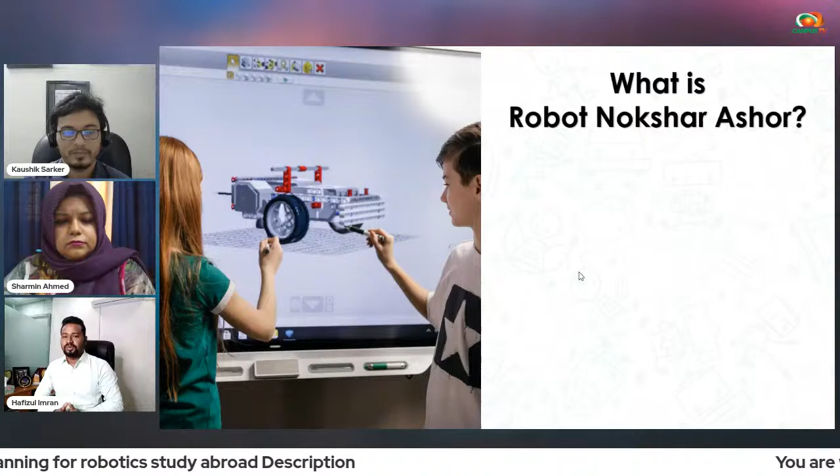Now I am presenting an overview of Robot Nokshar Ashor 2021. So what is Robot Nokshar Ashor? It is a platform where innovators from our country can showcase their innovative ideas through 3D design. This is a place where they can choose any of the allowed categories in the competition and design their innovative idea in the form of a 3D model to submit and showcase in this competition through a VirtualGate.

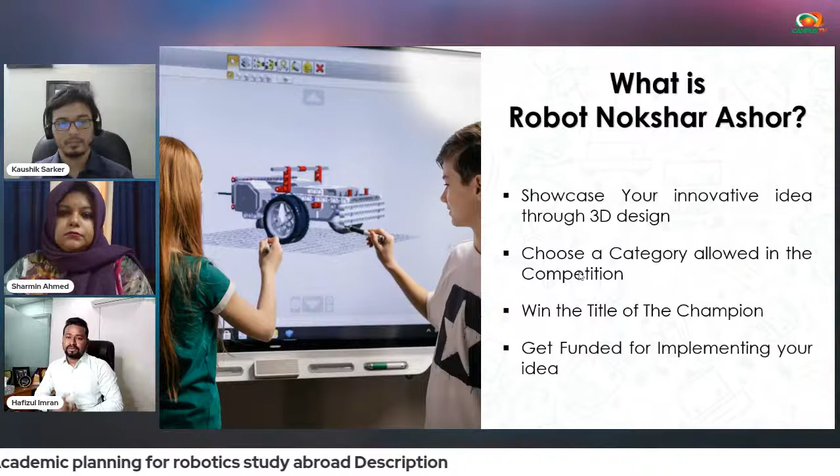After that, an expert judge panel will evaluate their 3D design and announce the winners and championship. After that, finally, all winners will get funding from this show. Participants from different schools, colleges, universities, and professionals are participating in this show. In total, we have selected 30 teams in the preliminary selection for this Robot Nokshar Ashor 2021.

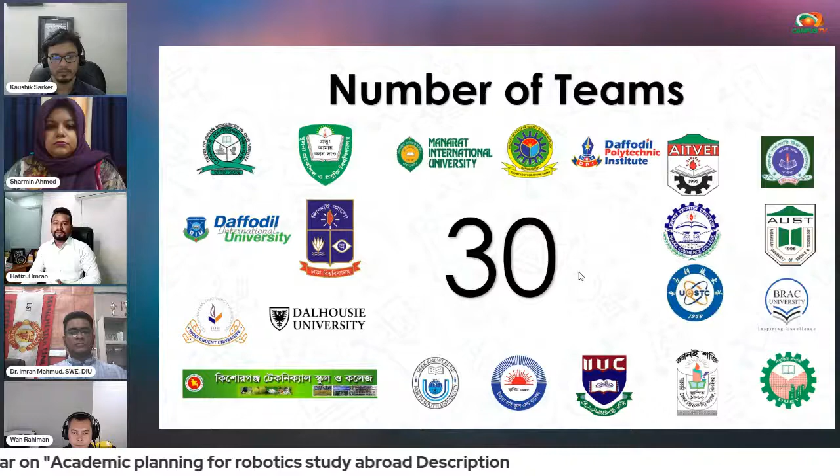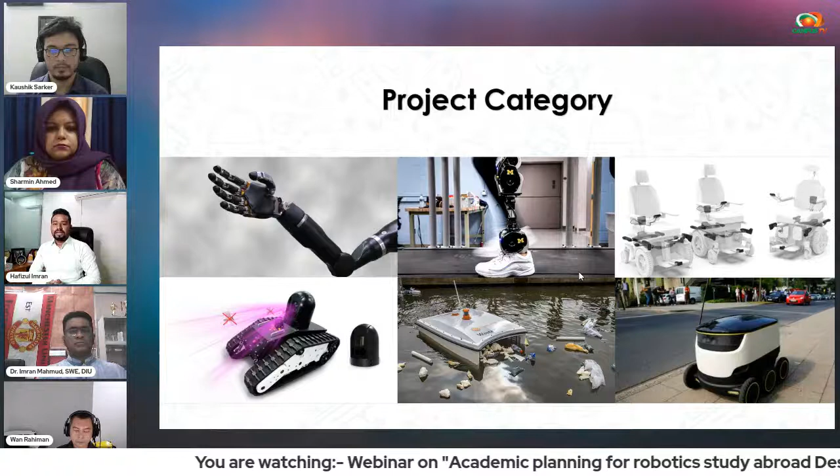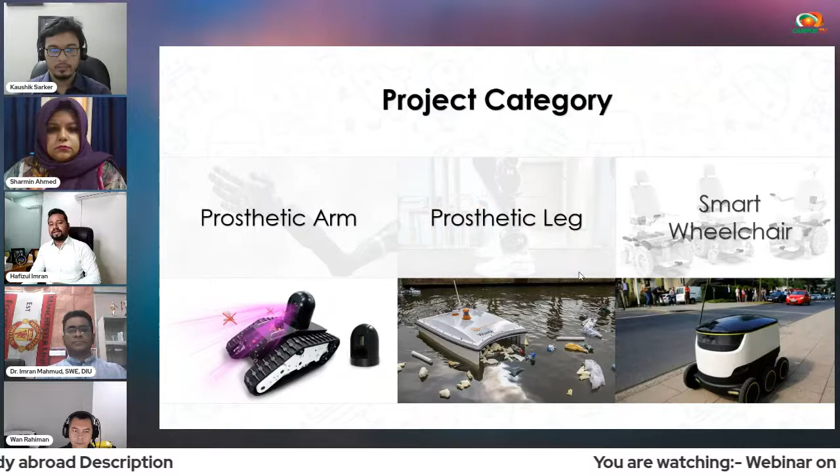These are the project categories from where participants will select one and design their ideas through 3D design, 3D model, and submit their ideas in this competition: prosthetic arm, prosthetic leg, smart wheelchair, robotic mosquito killer, river surface cleaning robot, and autonomous delivery robot. These are all the categories allowed in this show.

So what are the steps in this show? First is registration, second is preliminary selection, and third is training and workshop. We have already completed these three steps, and we are now at the stage of designing the 3D model. In this stage, participants are designing their innovative idea in the form of a 3D design, after which they will submit the necessary files for the final competition and showcase their design through the VirtualGate.

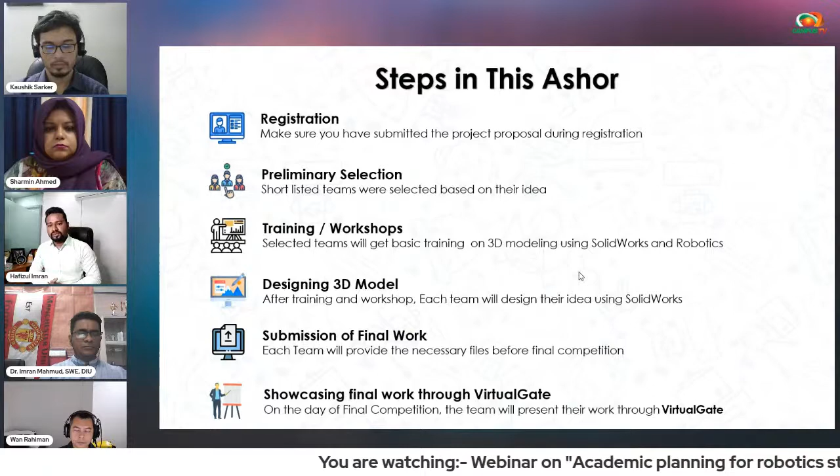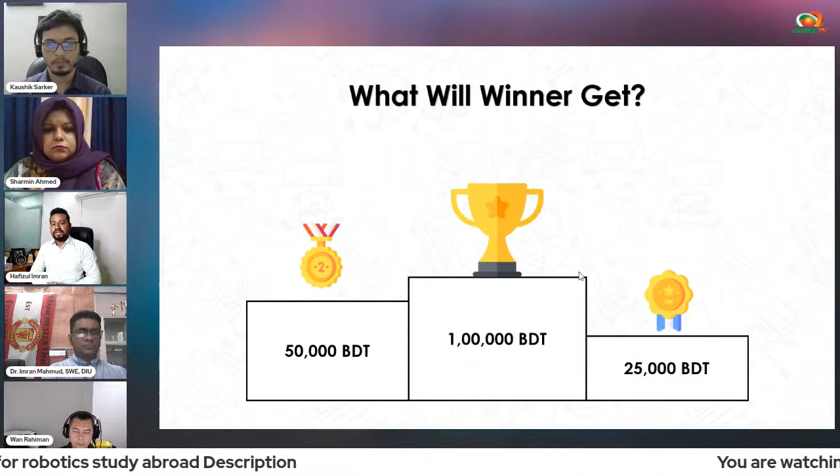So what will the winners get? From this show, the champion will get 100,000 BDT, the second winner will get 50,000 BDT, and the third winner will get 25,000 BDT.

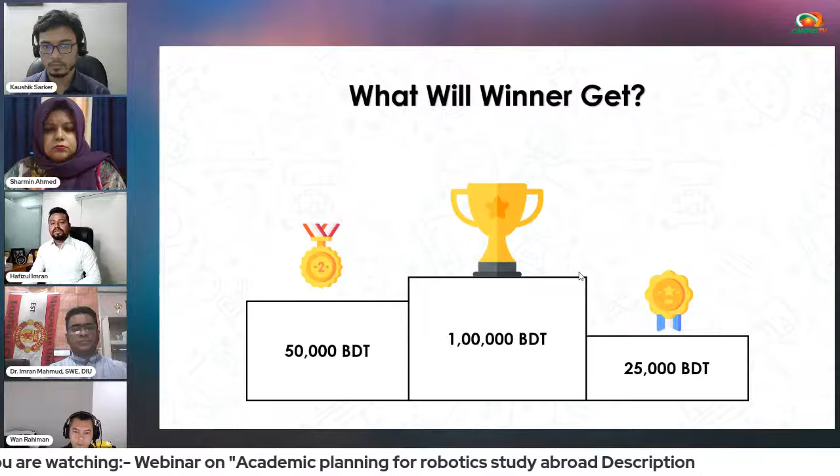This Robot Nakshatra 2021 is proudly organized by Daffodil Robotics Lab and hosted by the Department of Software Engineering, Daffodil International University, and proudly sponsored by Felicity IDC and Daffodil Computers Limited. We have with us event partners Bangladesh Robotics Foundation and JCI Dhaka Heritage, and media partner Campus TV. So this is all about Robot Nakshatra 2021.

Now I would like to present the Daffodil Robotics Lab promo video.

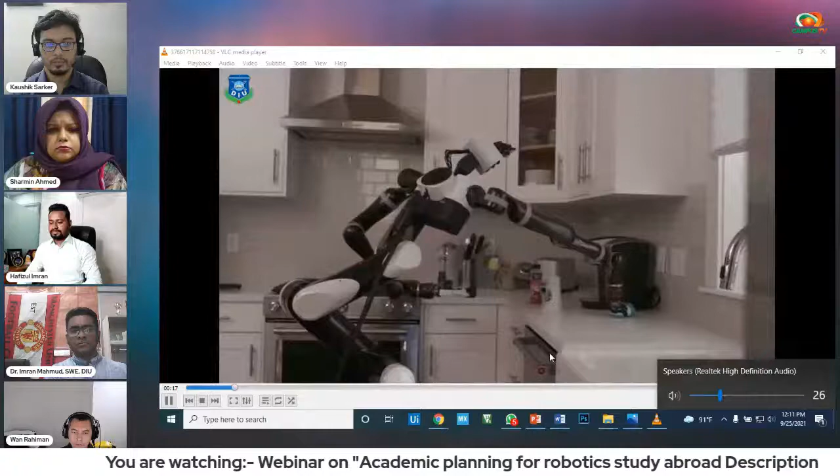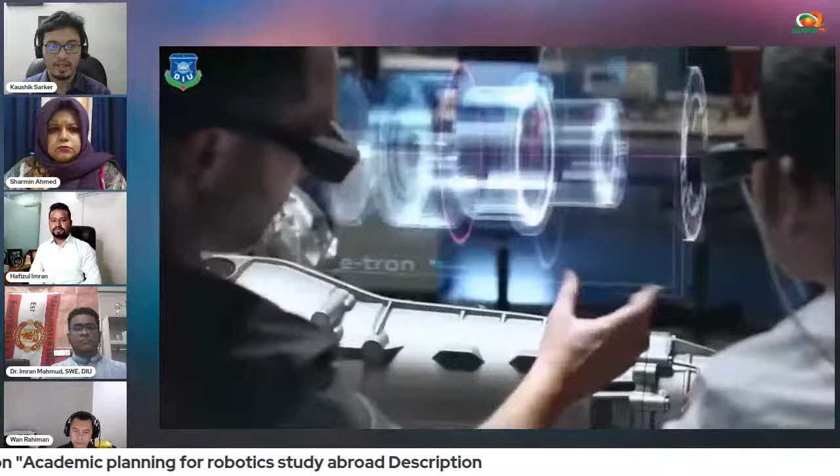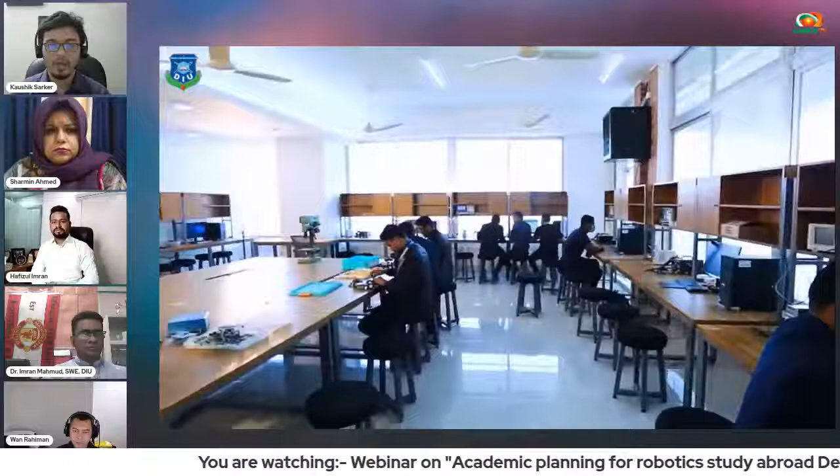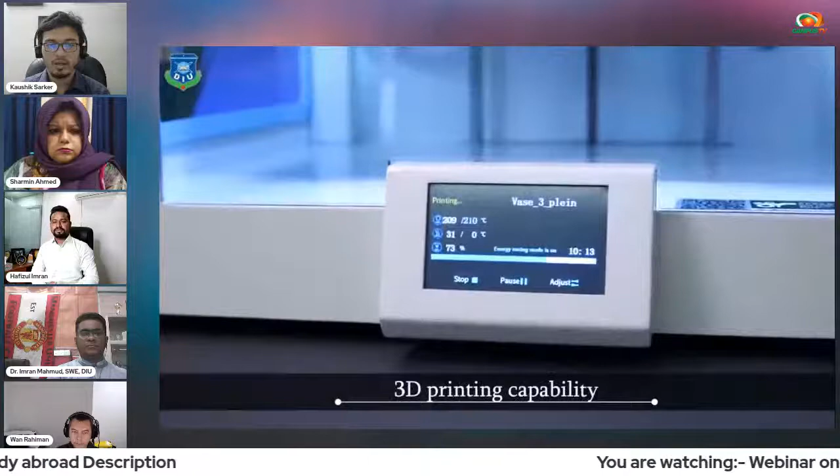Since we're having a problem with the sound, I can at least describe it in parallel. We have an 1800 square foot lab in the Daffodil Smart City. We have two sections in the lab: one section is for students to conduct classes and develop robots in the makerspace, and the other section is all about robotics research. They have a lot of machines, high performance computers, and devices in the lab. Many of the devices have been bought from Japan and China. These robots are from China - UBTECH robot - and Daffodil Robotics Lab has affiliations with other organizations in the world, such as UiPath, UBTECH, and UR Robots, all of them.

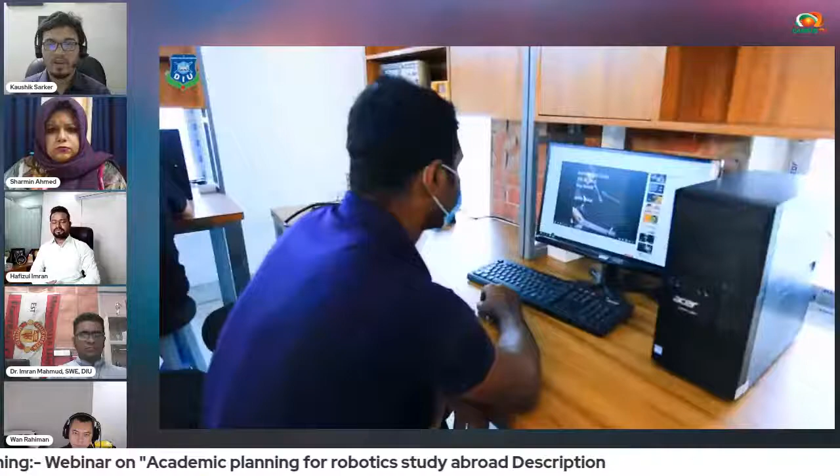It is to be mentioned that Daffodil Robotics Lab already developed their first robot, developed by Mr. Hafizul Imran in association with the Robotics Lab, and the advisor at that time was Professor Takayoshi Suzuki from Japan, who is also a visiting professor of our department at this university.

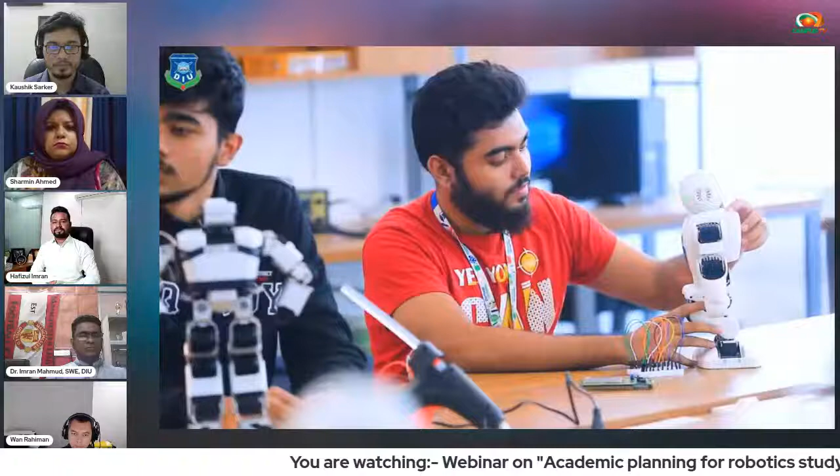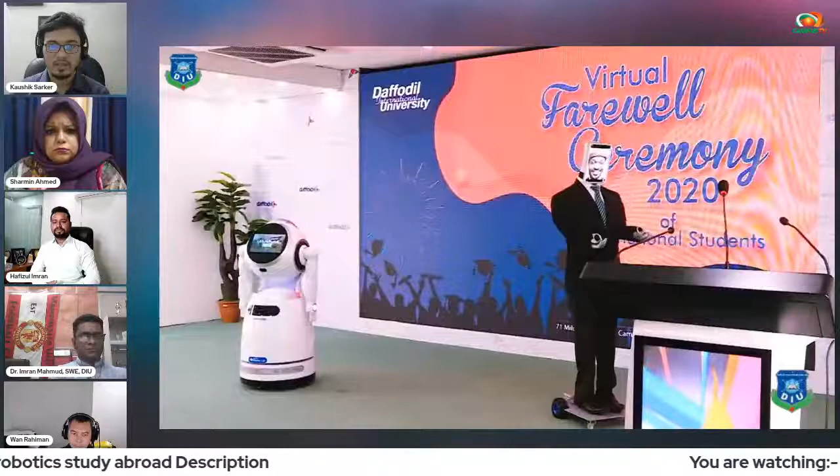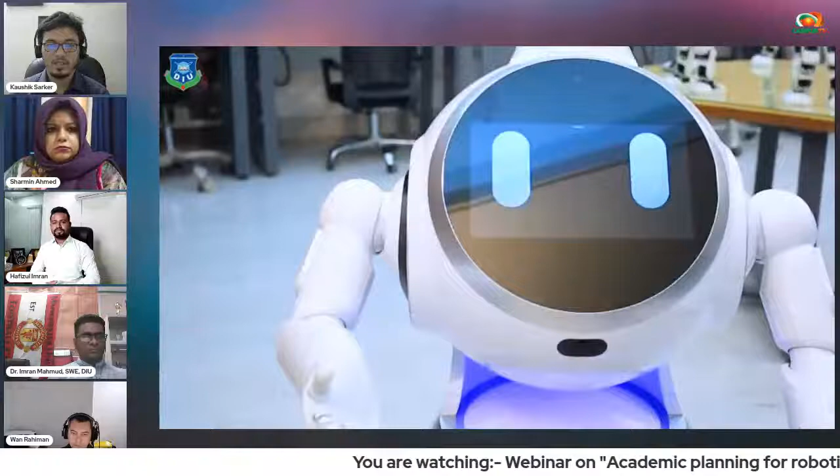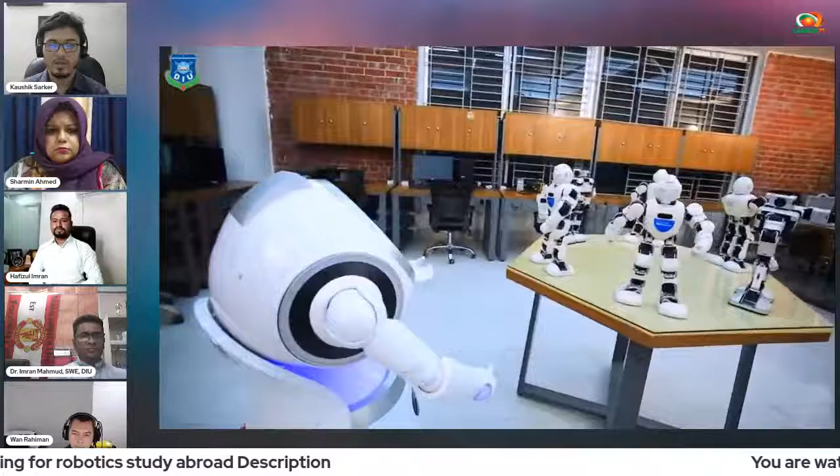We have already facilitated many programs. This is the virtual ceremony of the university, and this is another ICT program of the university where we performed with the robots. We have offered a major in robotics and embedded systems under the software engineering program. This is the Cruzr robot, and this section is the research and development section of the robotics lab.

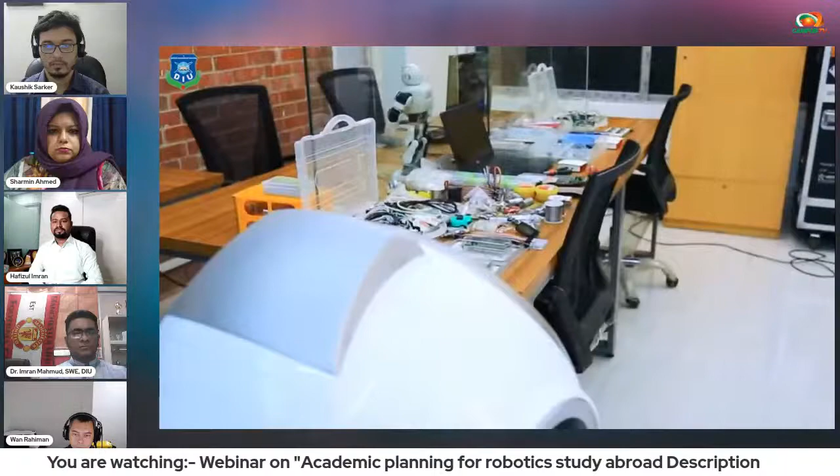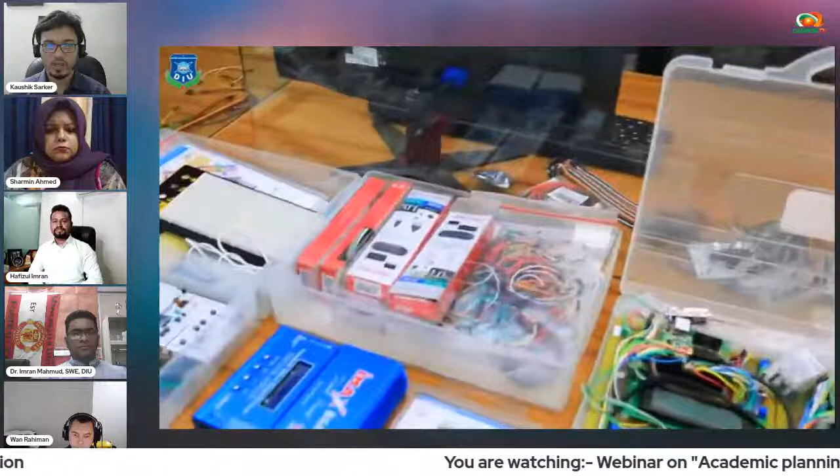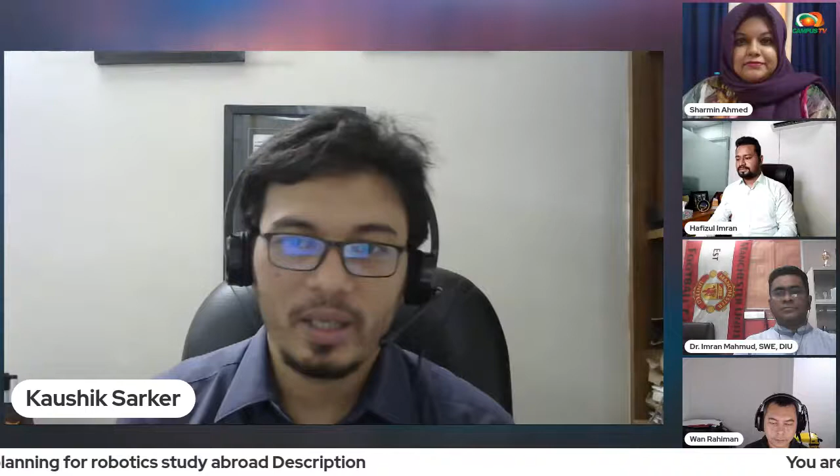Thank you, Sharmin Madam. It was very great to know that you did exactly what our students are planning to do, or maybe they have a plan to do such things in future. So today's webinar is all about the study of robotics abroad, and especially we'll talk about it from the perspective of Malaysia, because they have a world-class university there, and they have this area of interest they are working on.

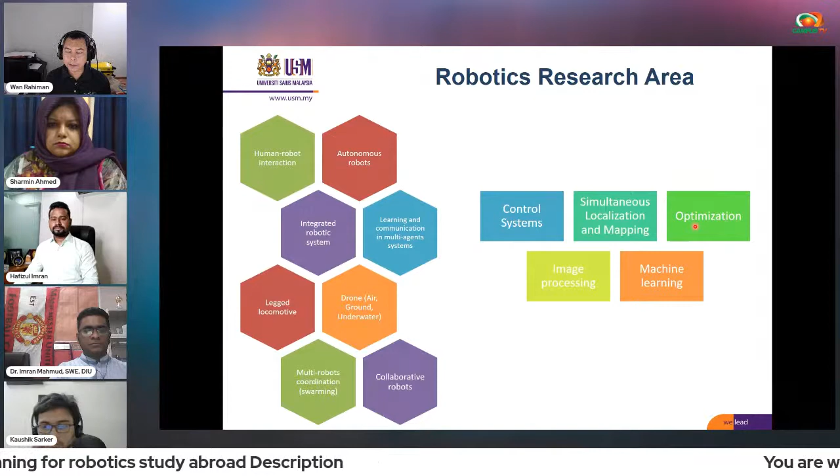And another one is optimization. How you optimize your system so that the robot system becomes more effective and efficient to suit the particular task.

And then another one is image processing. Image processing normally used or implemented to recognize and identify the object, and it also can be used for navigation.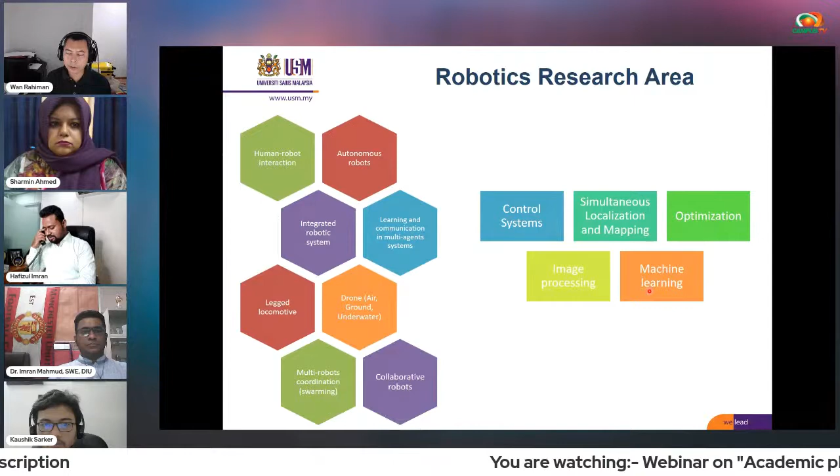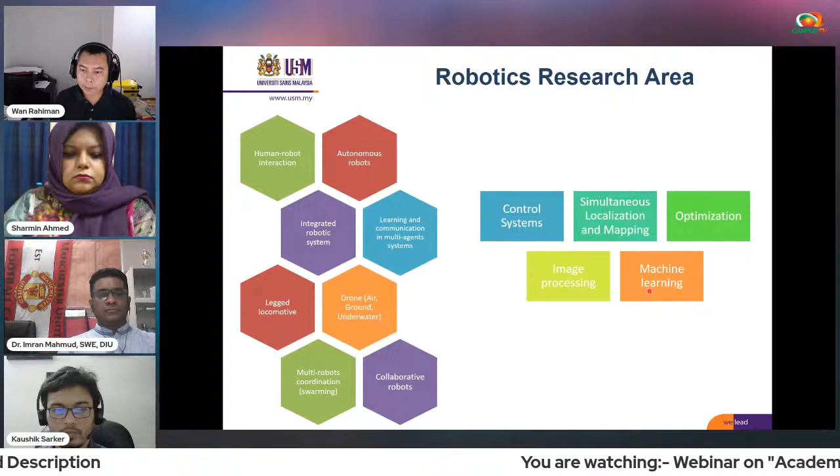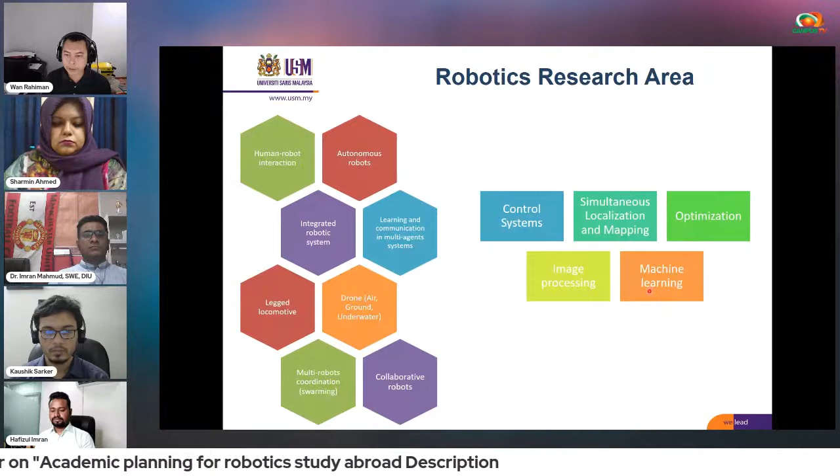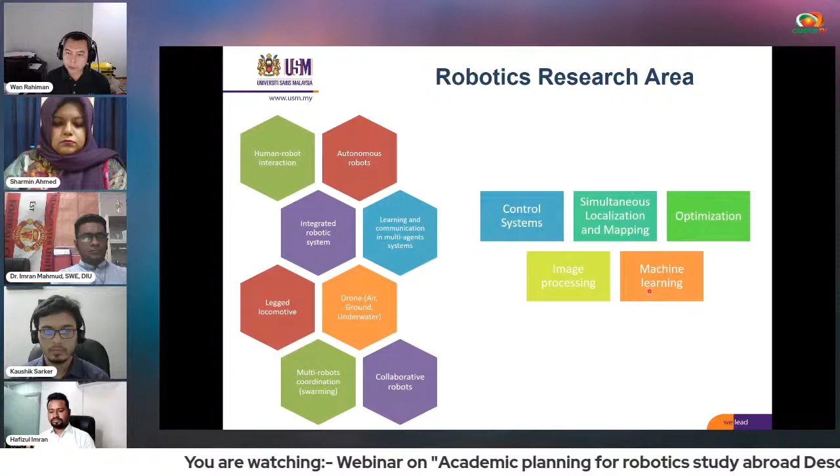And then the next one is machine learning. This consists of AI, artificial intelligence algorithms, how the machine can learn in order to perform a better job. For example, a toddler has to learn many times to pick up and place an object. So with AI features, we can teach the machine to learn to pick and place, because in industry there will be many shapes for the machine to pick, and the object has too many varieties of weight. So if you have lots of shapes and different weights, the machine has to learn where and which position the gripper has to pick up the object.

So because of that, if you implement this AGV in the manufacturing plants, it will affect or impact the productivity of the production line. So because of that, the low output will give low income to the company.

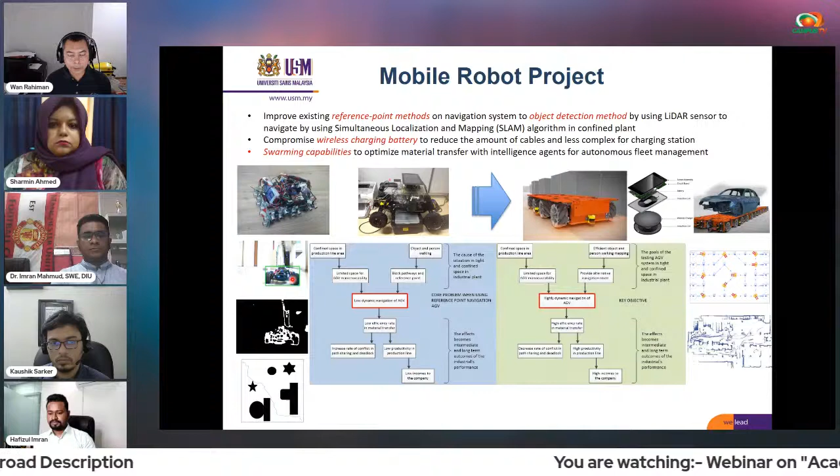So the application here, because here you can see this only for the robot, but what is the real application in real life? It can be applied when we want a partial autonomous vehicle when we drive on the highway. Our vehicle just follows the lead vehicle in front of us, so we just leave the steering, relax, and control only the gas and brakes. This is what we call partial autonomous.

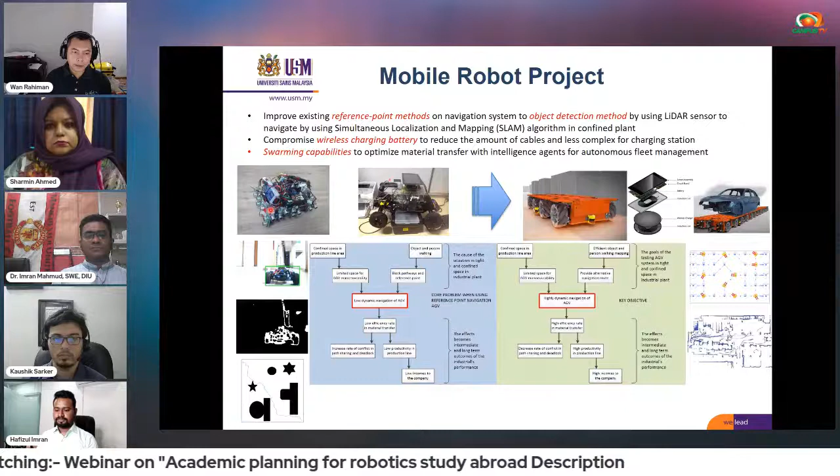So this is my first prototype, and we won a robotic competition in Malaysia organized by National Instruments. We are the champion in Malaysia, and then National Instruments sent us to Australia to compete with Australia and New Zealand team members.

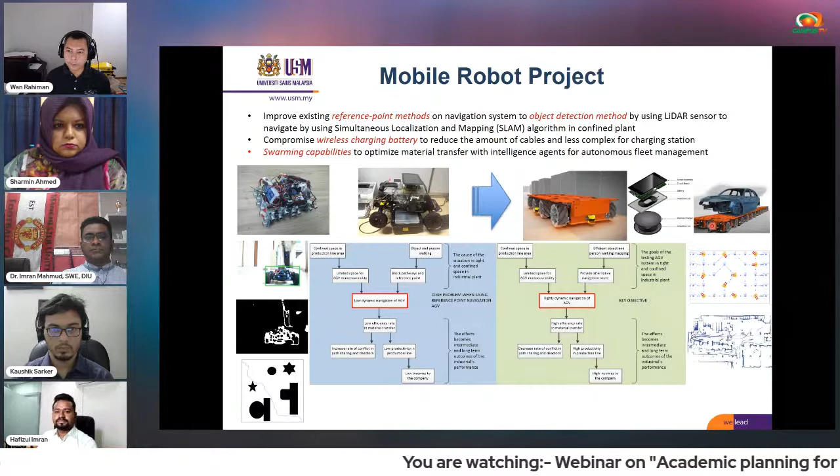So once I developed this small prototype, we went to a bigger model. Here you can see the camera, control systems, and a small computer implemented into the model. Our target is to develop an autonomous guided vehicle that can collaborate with another AGV to perform a fleet, or a pack of robots, to carry out a heavy payload.

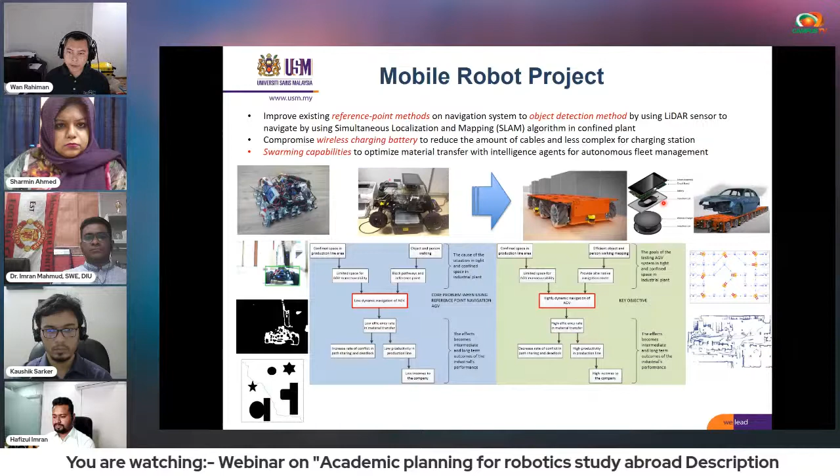And also here we developed wireless charging for the AGV. We use this technology from the latest development in smartphones. We studied how the smartphone can do wireless charging, and we implemented this technology into our prototype.

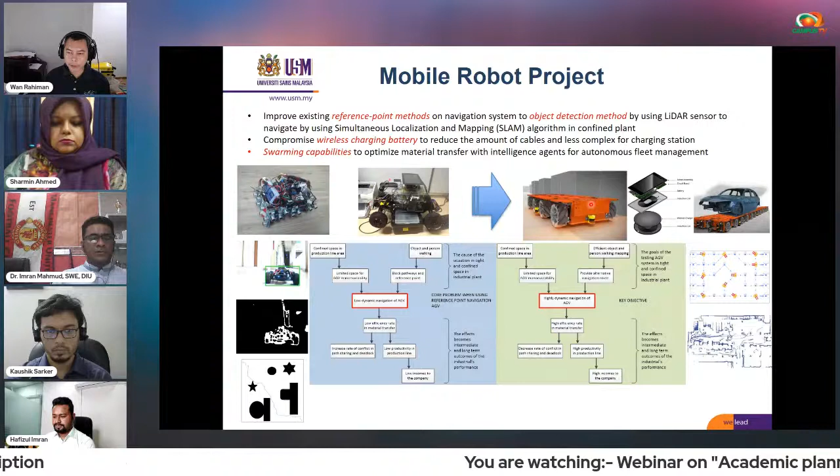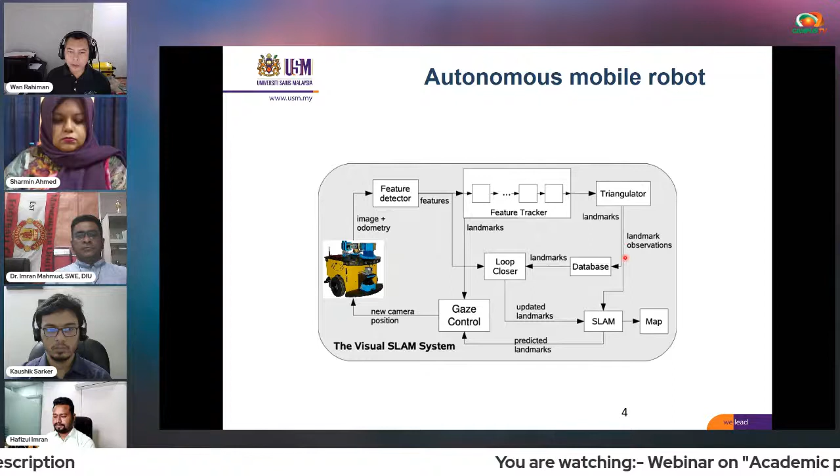On this slide you can see in one autonomous vehicle or mobile robot, there's a lot of controllers or algorithms connected to each other. So here you have SLAM, from SLAM you have the map, and it connects to the controller with feedback and everything. So there are lots of areas that can be explored.

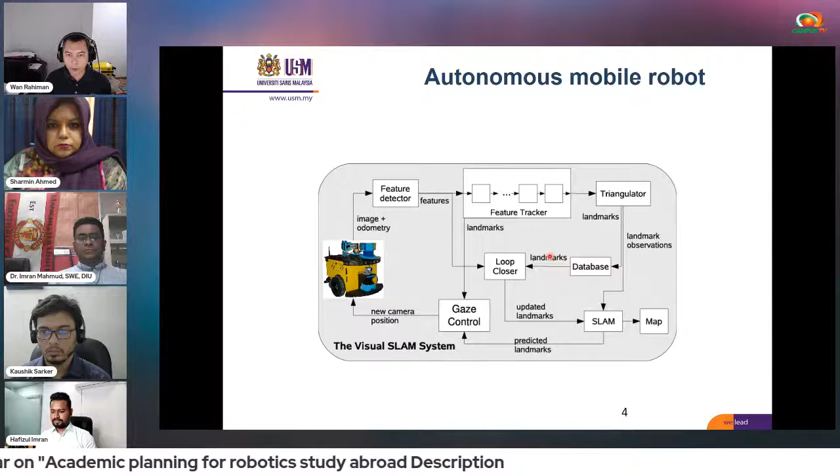For example, first you can have system modeling. From here you have image and odometry to calculate the distance, and from this information you develop the mathematical modeling. So there's another area you can explore, which is image processing, and also LiDAR data optimization.

And also this area keeps continuing into data acquisition field, artificial intelligence development, machine learning, and controller design. So from one mobile robot, there's lots of things you can explore.

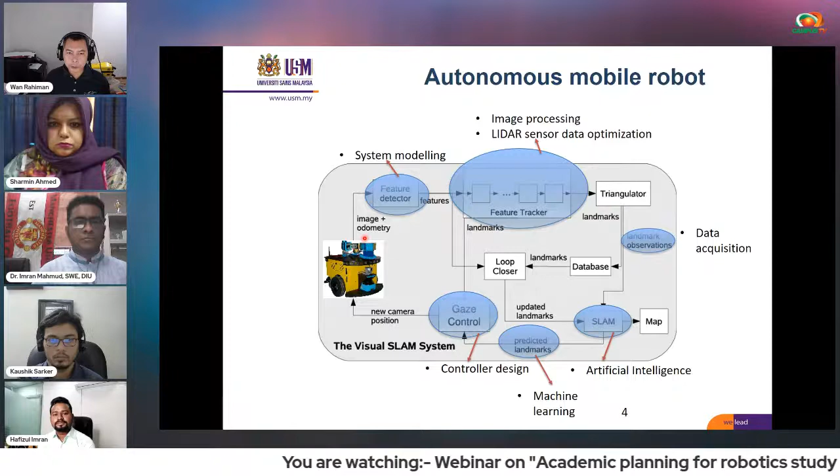Okay, this is my current research project. Of course, my interest is in drone technology. So I have done with mobile robots, now I am exploring another technology of drones. Ground drones are already covered, so now I am exploring myself into flying drones and autonomous surface vessels.

So here we do lots of things similar to the mobile robot. It will involve image processing, navigation, and stability. And then I add up one more thing: fault detection. How we can detect the fault of the drone, flying drones, from the propeller into the flight controller.

From there I also have another project, which is UVC COVID-19. So with this machine, we're exploring how we can control the energy of radiation that can be blasted into the surrounding area. This COVID sanitization machine will be connected into image processing, where we have a camera to detect any signs of possible COVID-19 virus.

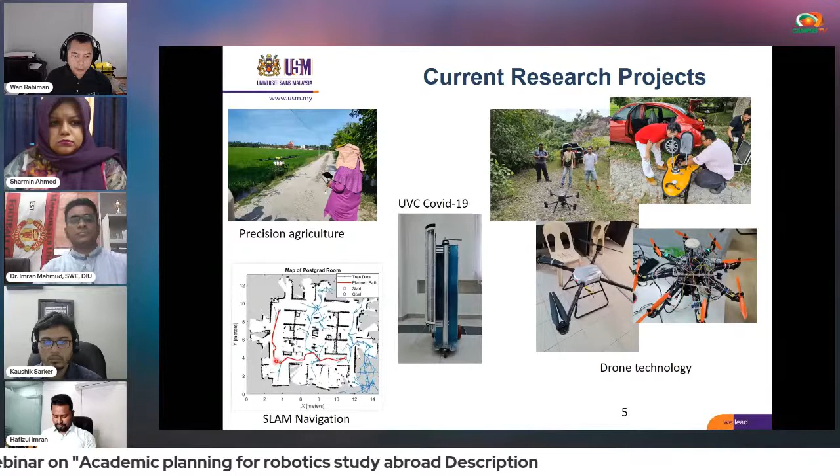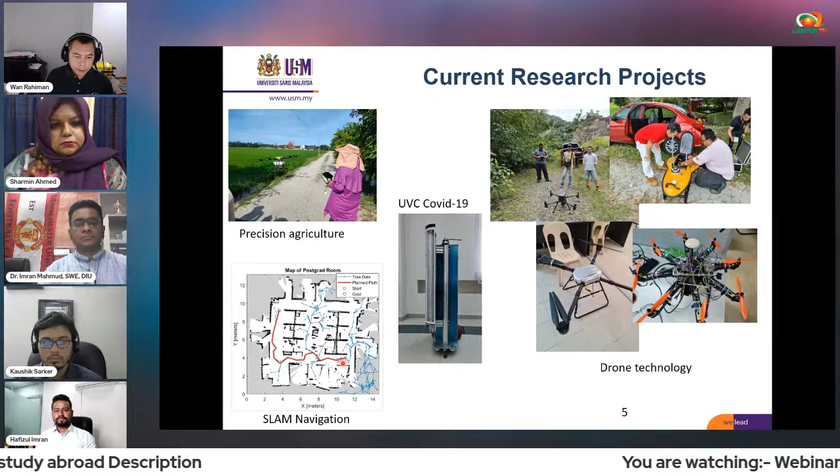Okay, on the navigation system, we try to apply intelligent navigation. So here we have lots of algorithms. We implemented animal, or we call it bio-inspired navigation.

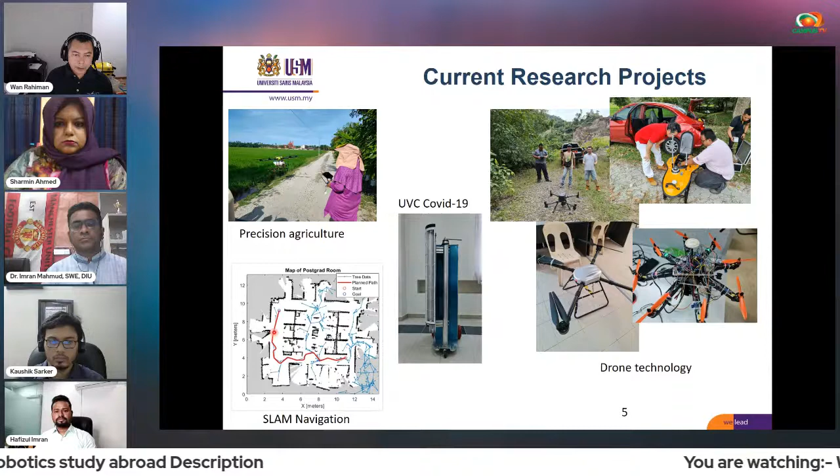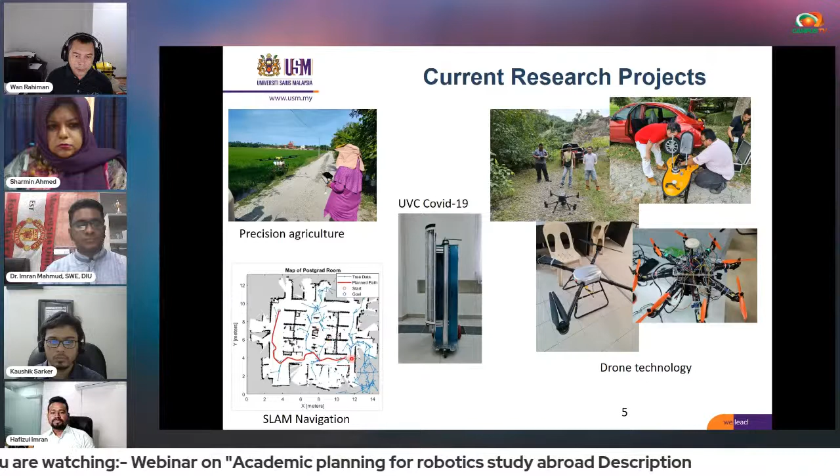On the algorithm, the robot calculates this line. There are so many obstacles, so it will not be safe for the robot to travel through this line, and this line probably will take more time to reach the target line.

So based on the calculation, the intelligence algorithm decided to take the first path.

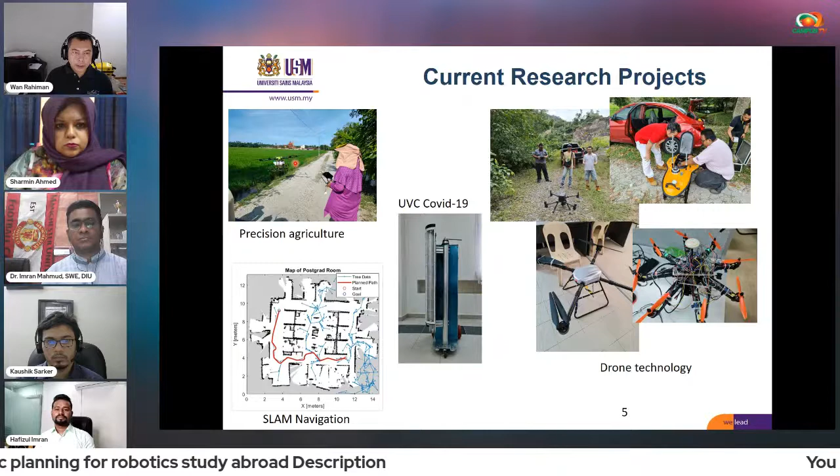I also explored precision agriculture. This is the drone used to spray fertilizer and pesticide on the paddy field. We studied the stability and impact of the drone when flying very close to the ground, what the flight management gives in response, and then developed an algorithm to stabilize the flight.

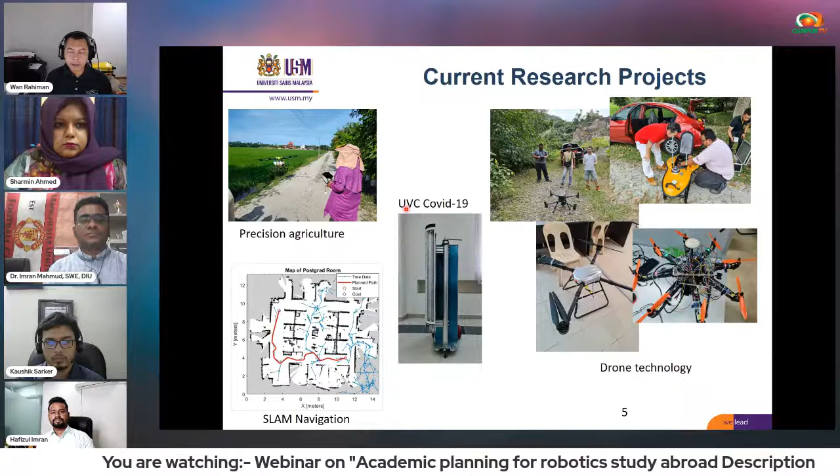This is the project I'm currently conducting for the robotic application. Now this is my achievement so far.

In 2021 alone, I managed to publish 6 articles in ISI indexed journals: 3 journals for Q1, 2 journals for Q2, and 1 for Q3.

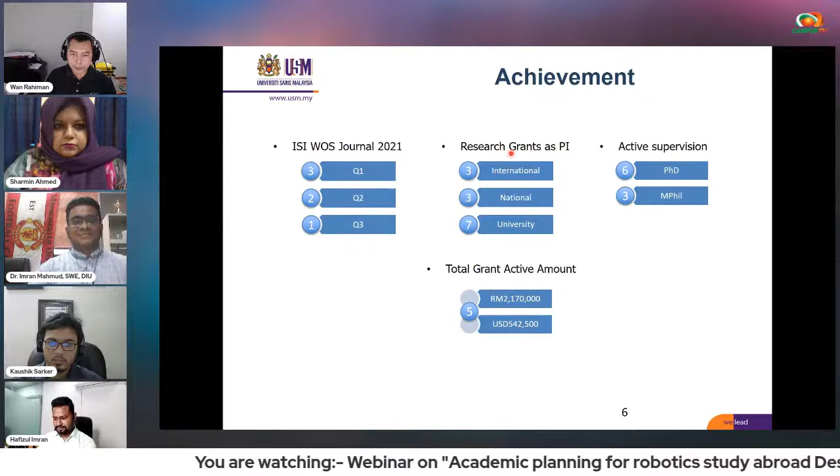After 10 years of servicing and becoming a researcher in robotics, I managed to secure 13 grants. 3 of them are international: one from the United States called Fulbright, 2 grants from Japan, and 1 Asian grant. All 13 grants focus on development of robotic systems.

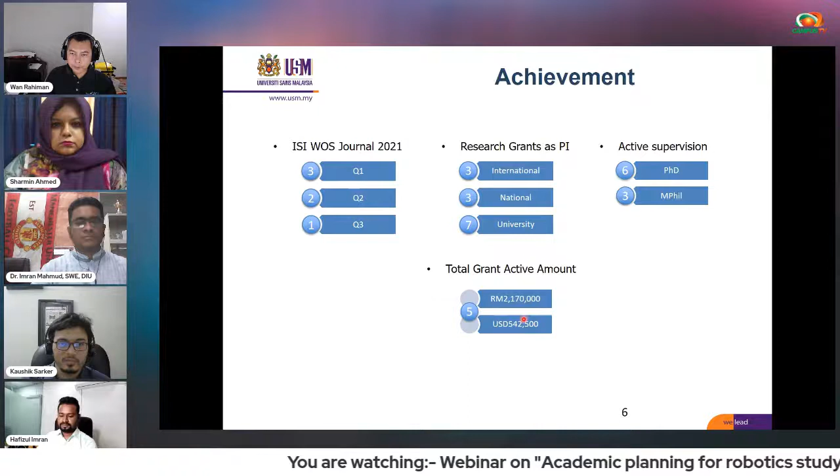Now 5 grants are still active, worth more than $500,000 US dollars. From this grant, there are 9 students still active with me: 6 of them doing a PhD, and 3 of them doing master's.

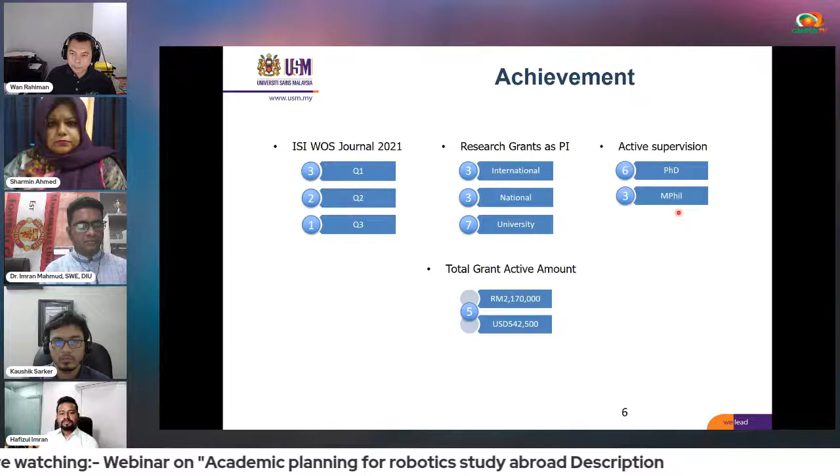MPhil here, I use the term taken from Britain, which is Master of Philosophy. But in Malaysia, normally they just call it master, because master can be divided into two: master by research and master by coursework. So MPhil is the master by research.

If you are thinking to become a postgraduate at USM, University of Science Malaysia, I think this is the time to grab the opportunity, because now the university allows research and supervision to be carried out remotely via online platform. This means you can be based in your own country while doing the research. You don't have to come to USM — you can stay in Bangladesh and carry on your research.

Once you register as a student, you have to take a research methodology course. This course was introduced last year, and you have to take it during your first semester. This is to make sure you really understand what you are doing and what you want to achieve in your research.

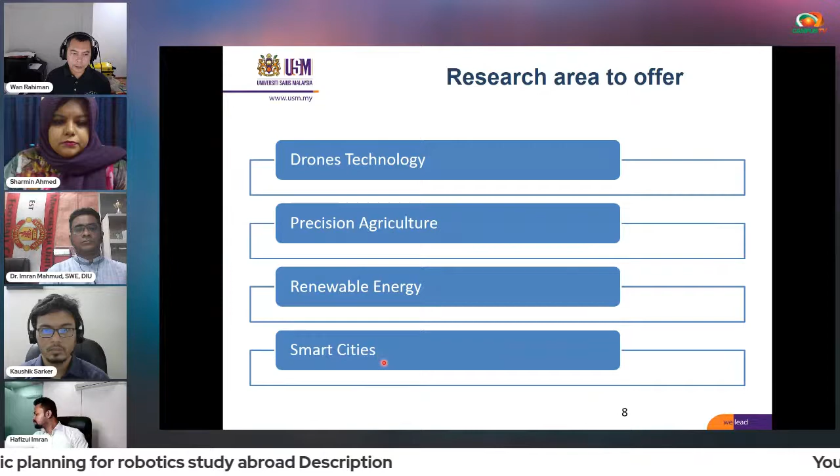There are four areas you can explore. One more thing: if staff from an international university decide to do a research study in USM, the first step is to establish a memorandum of agreement between your university and USM, so that we can have a proper agreement for students or staff to study here in USM.

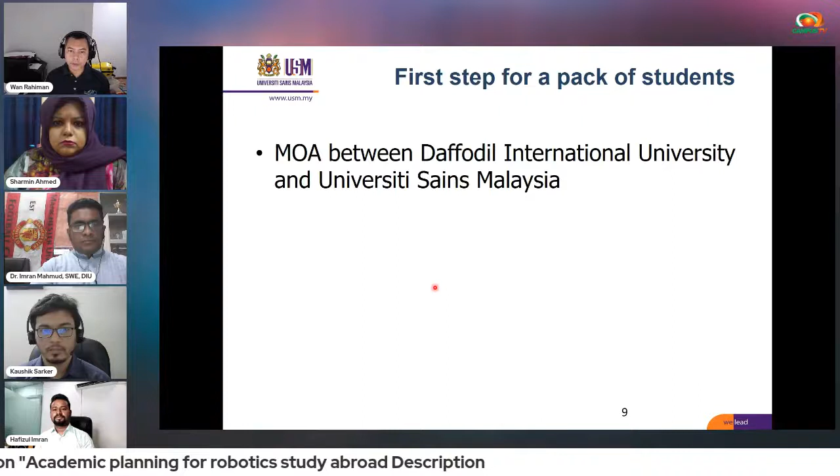Thank you, Dr. Wan, for your presentation and for showing us your area of interest, your research, and the future prospects for students willing to study robotics. So, ladies and gentlemen, you've seen that Dr. Wan showed us 8 robots, and talked about 5 areas of research.

If you remember, that means you are already aligned with what Dr. Wan showed you. So you are asking what are the algorithms for vision, learning, and navigation systems. If you carefully watched his presentation, he already mentioned the navigation system, the SLAM navigation, and the bio-inspired algorithms he is following in his applications. There are a lot of algorithms in 3D image processing, 3D CNNs, optical flow, the KLT algorithm, and other algorithms.